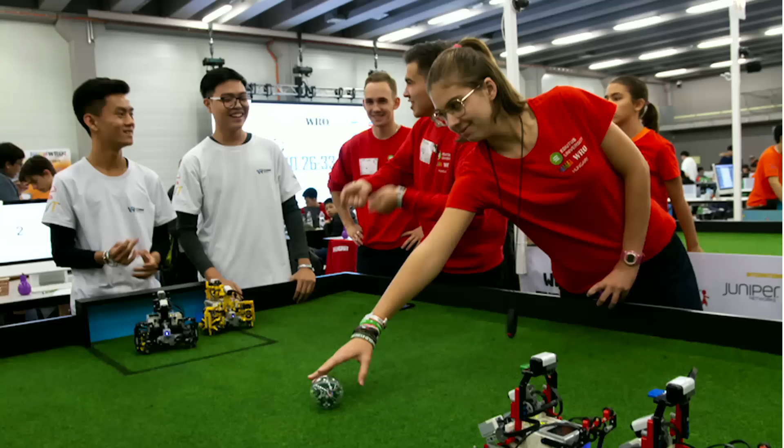We also had kids who had to learn how to program robots for Lego robot football. To realize this, we had to make programming very easy and accessible. Otherwise the kids wouldn't have had the attention to get into programming these robot football players. So we learned something about easy programming from doing that.

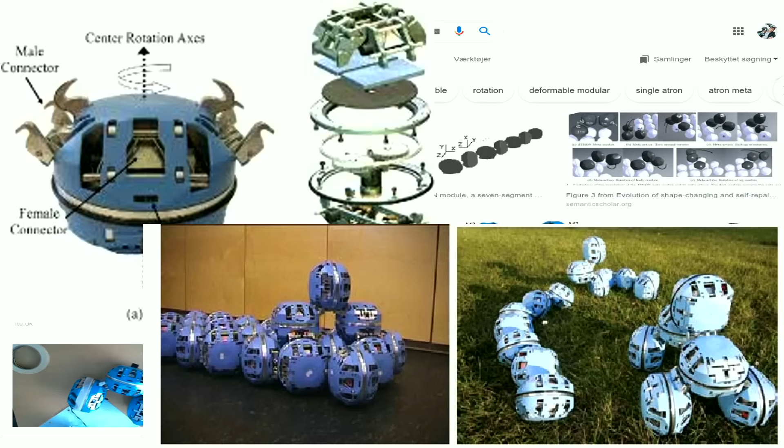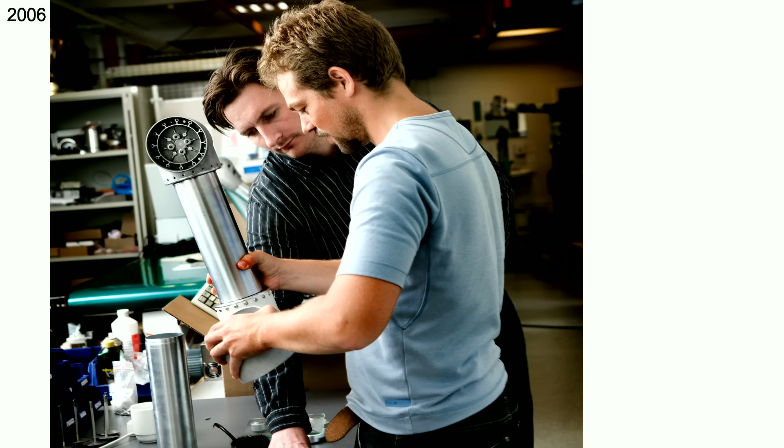That is what made us create Universal Robots, where we started garage style. Here it's Kristian Kassow, the other founder of Universal Robots. We were spending a lot of time coding with oil up to both elbows, trying to build this robot. In the end, we managed to have a robot that actually worked, and in 2007 we had the first working prototype.

I had a meeting with Al Gore and a lot of others. So it became a big thing when we sold the company in 2015, because that year it was one of the largest technology exits in Europe, and it was, of course, a big deal. We sold it to Teradyne for $350 million. I stayed working there for 4 more years, but it was not my company anymore.

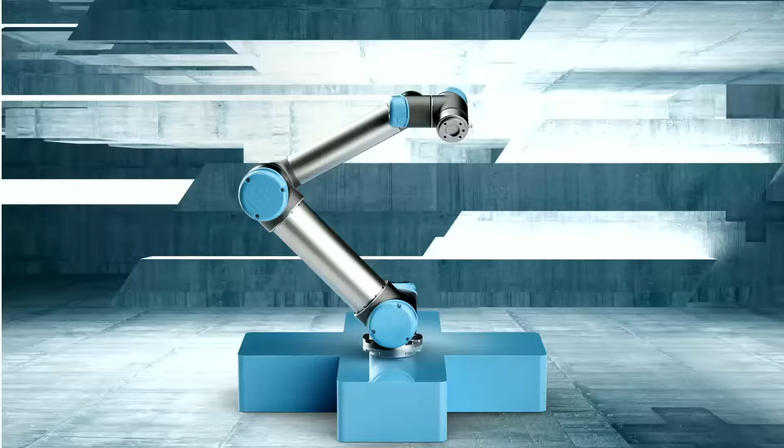So 2 things we did well besides creating the cobot: we also created an academy, which was about lifting people up to understand the technology. The main problem we are addressing is that there are not enough system integrators in the world that can actually do automation. So if we make the robot easy to use, and we train people to become better at programming robots, and we create this ecosystem around the robot that packages technology up into more digestible bundles, we have a winning recipe, I would say.

So we make technology bundled and packaged easier to use for users. We lift the users up to become more tech savvy, and we make a robot that is as easy to use as possible. That's kind of what was the recipe for Universal Robots.

Today there are a lot of different companies doing the same thing. So 194 cobot models, last time I checked. There's a website only tracking how many cobot models are out there. So it has really created a lot of attention, this idea behind the cobot.

And it's also predicted to be a steeply growing market. The estimate was $1 billion market size in 2020. That includes the integrators and the producers of accessories to the robots. And an estimated $8 billion market size in 2026. So it's a steeply growing market.

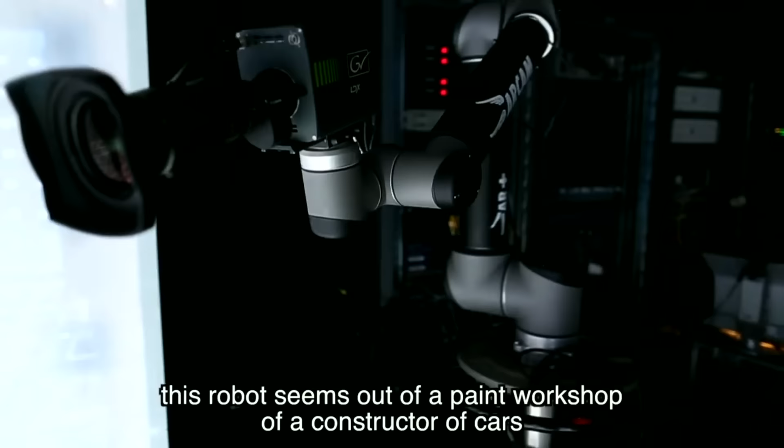And the applications for the robot were also so many new things we had never imagined. The Olympics in Rio had these robots filming both the swimming stadium and the track and field stadium, sitting like this in the ceiling over the commentators. We had this company doing TV studio robots. We have construction sites where these robots are coming in.

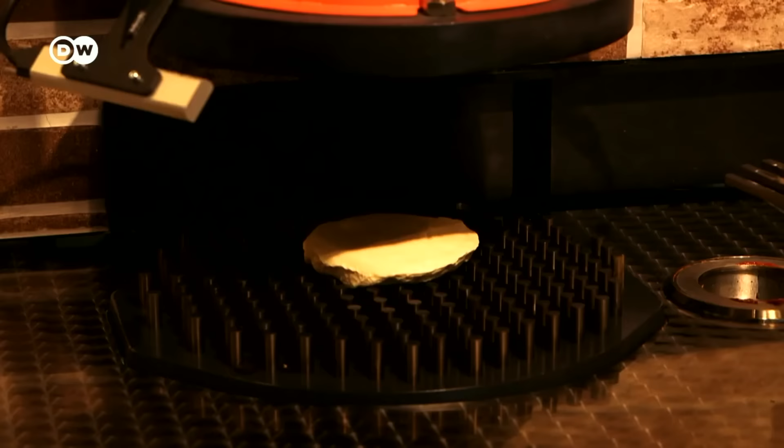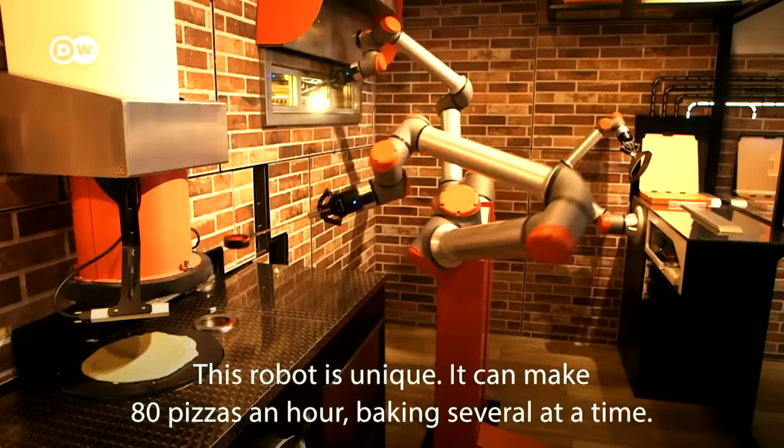And recently we were in Paris, and we saw also our robots producing pizzas near the Centre Pompidou in the center of Paris, where a company has made an application where the robots are serving pizzas. The point is that once you make robots more accessible, there's so many new applications that you open up, and that has been very exciting to see how many new applications the robots have been used for.

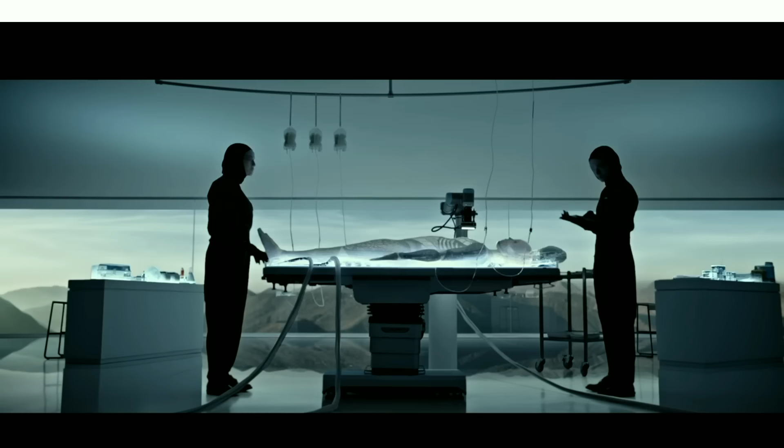I'm very happy when I see our robots used in the movies. It's always a surprise, but fun. I also like that they never redesign the robot - they think it looks futuristic enough to belong in the future. So they don't need to redecorate the robot to make it look like it's from a sci-fi movie. I'm happy about that.

But that was Universal Robots. So where did robotics come from? The idea with Universal Robots is to make this robot into a tool. That's actually a very old history we have - I couldn't find a picture of a Stone Age man, but human evolution has been an evolution with ourselves as a species and the tools we use.

Yes, there are drawbacks of technology, but our lives are also better than ever before. We have higher life expectancy, less infant mortality rates, and in general better lives than ever before in the world. So technology is generally doing good for humankind. That's how we evolve today - it's an evolution through our tools.

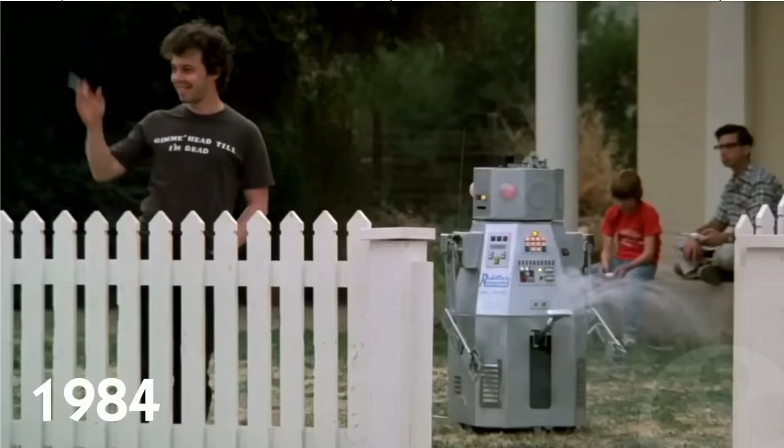At the same time, we have this arts thing going on - we use technology to understand ourselves through technology also. Robotics has some part of that background. If you look back at all the movies and how the idea of a robot has been evolving, they're often very scary robots, but also very interesting. That's why Hollywood and other big movie makers use robots - because of this fear and fascination concept, which I think is also why robots are cool, because they have this duality in them.

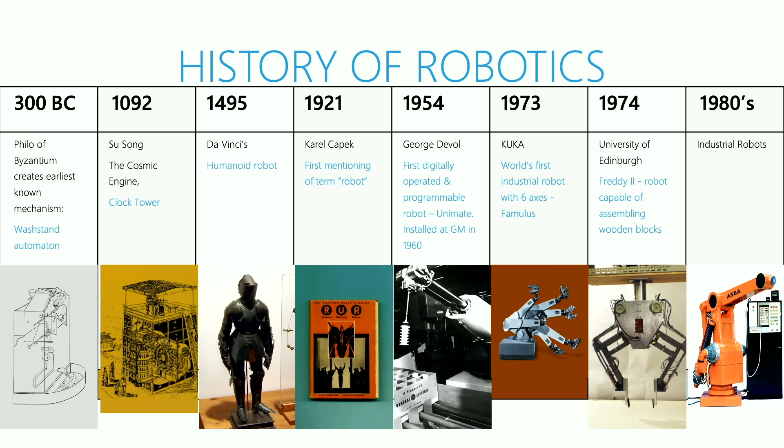Until the 1960s, robotics was in the arts world - it was in fiction, in these movies that I just showed. But in the 1960s, the first industrial robots became useful enough to be used in automotive factories. That's where we had the industrial robot arm revolution starting in the 80s and going on.

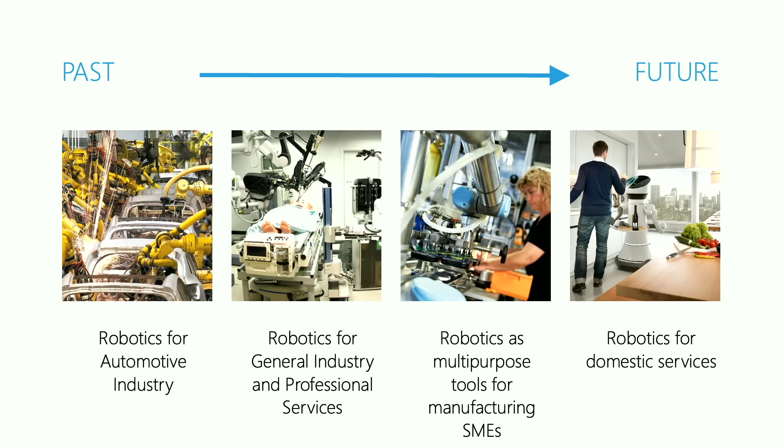The journey robotics is on is from this kind of robot we know from automotive factories, doing the same thing over and over again all the time, toward a future where robots are interacting with people and doing new things every time. That's the journey robotics is on. You can say the cobot is kind of a natural step on that journey, because it's less rigid than the old traditional robots, but not as flexible and safe as the future of robots will be. So we're still on this journey with robotics.

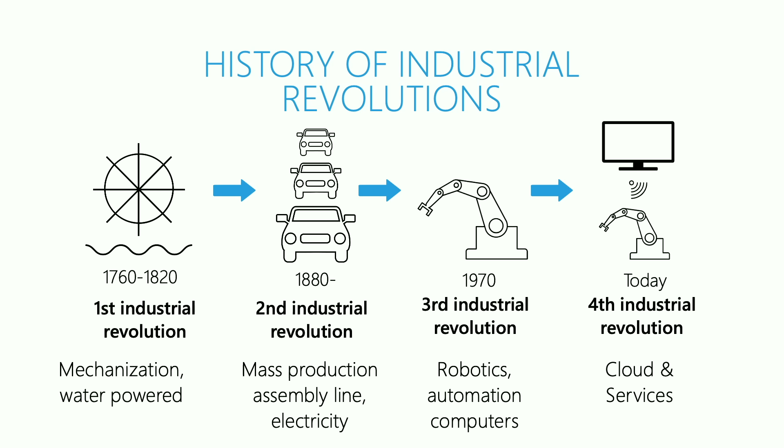Similarly, we have also used technology to create value in different ways, and the dominating technology at each era in our history has defined how we create value with our industry. These are the so-called industrial revolutions - mechanization of agriculture, electrification and steam power in the second industrial revolution, computer-controlled machines in the third, and now Internet of Things, cloud and services as this fourth industrial revolution. Different technologies that have revolutionized how we produce goods.

It turns out that human touch is something very valued by consumers - they actually want unique, well-defined products, and so on. So we're actually wasting something super valuable when we use humans like robots. But that was how it was.

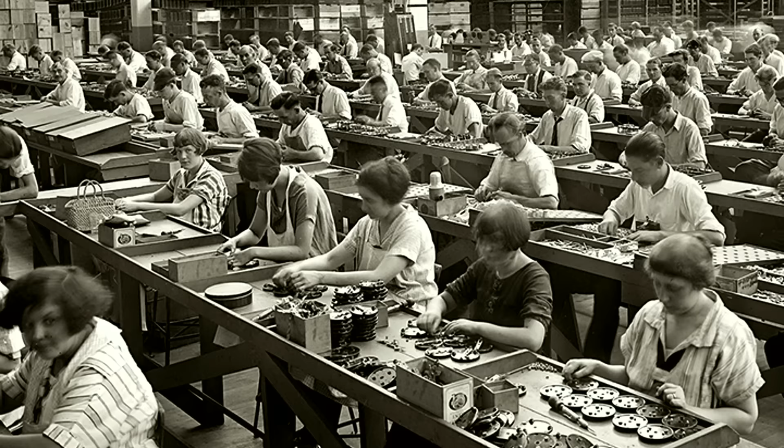So it came from a history of factory work being like this. All these people have work instructions. They are told exactly what to do at every minute, and they have to keep the pace, and they are not allowed to think for themselves. And here's a small kick to the school system - that's actually also how we defined our own school system. We are actually training a lot of students to become factory workers, and that's not what we should be doing. But that's another story.

But you would think that would change office work, that there would be no more office work, but it didn't happen. More people today work in offices than ever before, but they're not just typing the same letter, all of them. They're doing new things all the time. So the disruption the technology brings does not necessarily kill that category of job, it just changes the content of these jobs. And that's the point here.

So if you look across different job categories, you'll see that there's no job that's 100% automatable, and there's no job that's 0% automatable. So all jobs have some level of automation potential, and there are some tasks in each job that can be automated. Nobody's going to go untouched, but everybody is going to benefit from it. There's no single job that's going to be completely replaced by automation, and that's an important point.

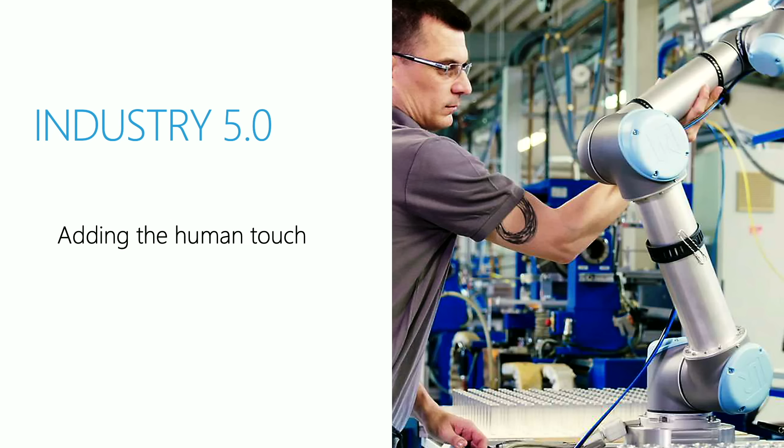And then what is driving all this? What is driving the change? Why are we all not unemployed many, many years ago, since we got the steel mills and the harvesting machines and all that? It's because we are all unique. We want to do something unique with our lives, and we don't want to have the same product, the same doormat, whatever as the neighbors. So there's this concept of Industry 5.0, which is what can we do in factories to produce this human value, this thing that everybody seems to long for.

And that is, I think, also a little bit what cobots did. It made it more easy for factory workers to become experts in their own processes and their own applications. And this mix of man and machine is probably the right way to realize Industry 5.0.

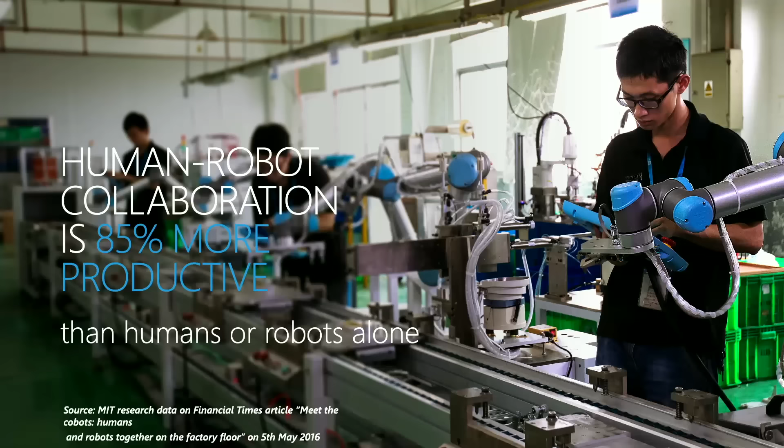And there's been some studies also. I have actually been to this line, I think it was in Taiwan or China, I can't remember exactly where it was. But they could change this laptop line in 30 minutes, and it was the same staff that worked in the factory that changed the whole line to produce a new kind of laptop, and it was very efficient.

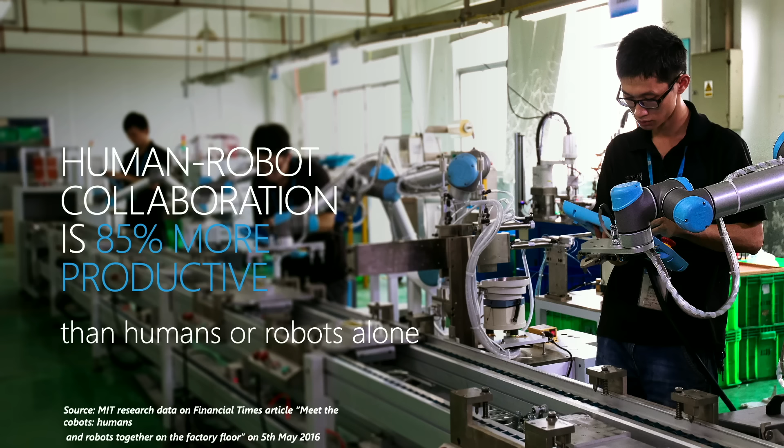So there's a paradigm change here where the Industry 4.0 ideal is a lights-out factory, fixed installation. You press play, the machine produces this good for 7 years at a high volume, low cost. Where the future, I would say, is more about a lights-on factory where we make factories into more friendly workspaces, where man and machine can share the workspace and create this high-margin products that I'm talking about now.

So that was Industry 5.0. So just to quickly go through what's happening in Odense these days. There's quite a vibrant robotics cluster in Odense. It's currently 10,700 employees in the companies, and it's growing very steeply. We expect more than 60% annual growth over the coming years. So that's quite a journey.

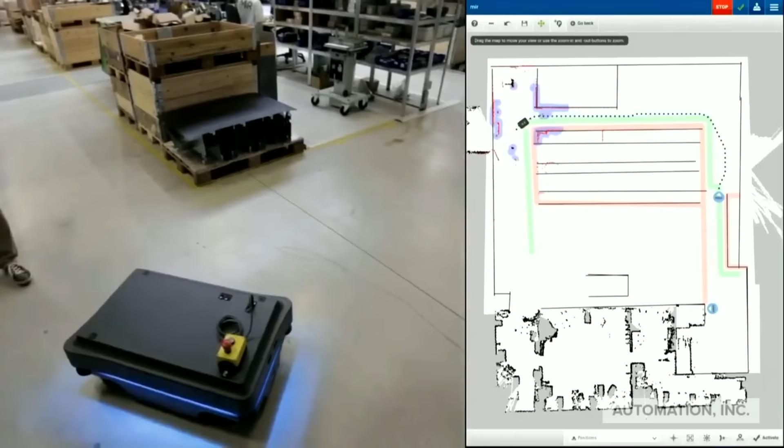And I also just want to mention that after I sold Universal Robots, I invested in mobile industrial robots, which is in many ways the same one. They had a product that, maybe you also know this one, that could drive around, build maps, and it's actually in many ways the same idea - you take technology, you make it accessible to the factory staff, and then you allow them to use it as a tool to create more value and be better at their work.

And sure enough, this company was also sold to the same company, Teradyne, this time for $272 million. As you can see in the analysis, it's actually pretty similar what these two companies have done. They've made the robots intuitive to use, putting advanced sensors into the machines. Safety and flexibility are important. That's the technology side. The market strategy side is local manufacturing and testing, no in-house machines, but selling through distributors and then supporting those distributors. That's the same business model for both companies.

And for myself, I could buy a nice car, and I bought a very fast one, 0 to 100 in 2.3 seconds. Then I had to think about what I wanted to do with my life.

One Christmas evening, 4 or 5 years ago, my wife and I were eating an egg sandwich, and I was in a life crisis because I had sold the companies. I didn't know what to do, and who am I if I am not Universal Robots? So she said, what are you going to do about number one, and what are you going to do about number two? The world really needs to do things, you can't just stop now. That was like, oh, that's a lot of work, how do we do this? We thought about making an education system because education is probably key to a lot of these problems. But since we don't know anything about education, we decided to make robots that solve the world's problems.

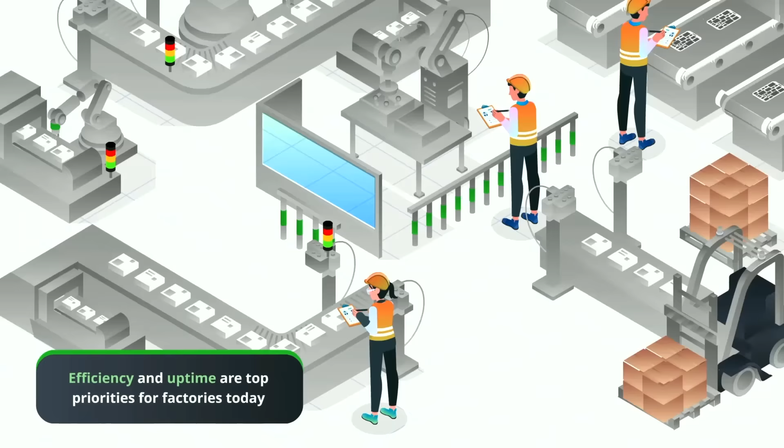Then we are working with a company in Industry 4.0. They have made this box that is an Industry 4.0 in a box, but in my perspective this is Industry 5.0, because they make it easy to use Industry 4.0. That's exactly the point of this company called Trendlog.

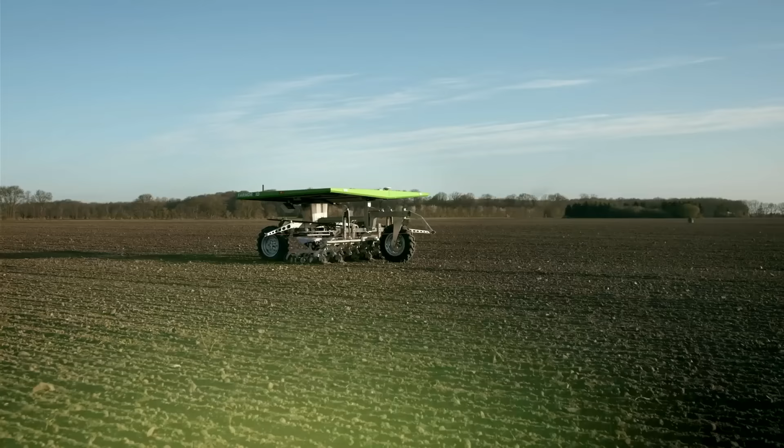We have a company where we make farming robots. This company is called FarmDroid, where they seed by GPS and then weed around it. It's also an interesting company.

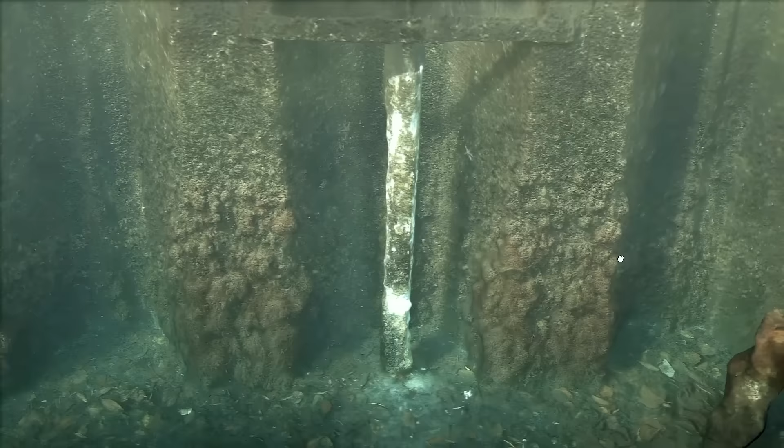We have an underwater robot company where this robot can build 3D maps of underwater structures. I just want to show you one of these maps — this is not a picture, this is actually a 3D map created of an underwater structure. If you see videos of divers doing these things, it's full of bubbles and other disturbances. So it makes a lot of sense to put robots down and build these 3D maps of underwater structures.

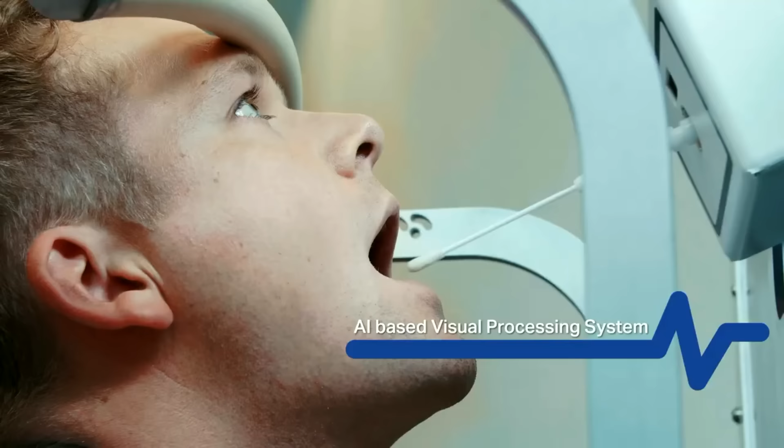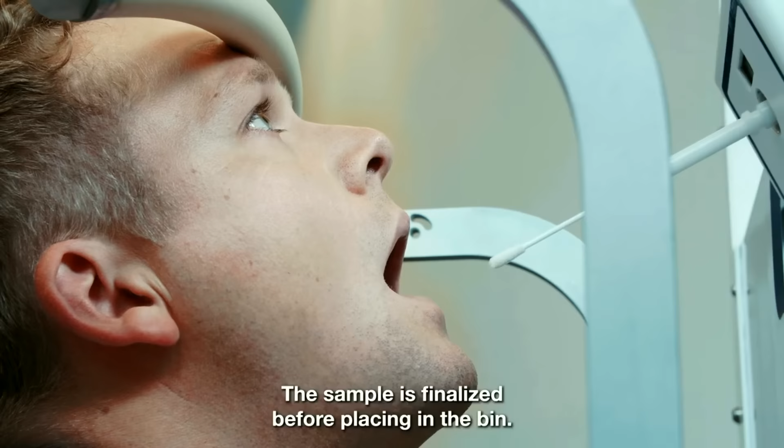Then here's a company that does corona testing, or swabbing of the throat. This is an AI-based approach where it identifies the back of the throat, and then the robot arm drives the swab into the throat and does the actual swab. We made this company when the pandemic started, and then we ran into problems because in Europe it's actually very hard to put products like this on the market due to regulation. It's a little annoying because we very quickly had a product that could solve a need the world had, but in Europe we weren't allowed to use it easily because of European regulations. I'll come back to that later — now I'll come to the blockers of what I think is blocking the adoption of robotics, and why it's not happening faster than it is.

And I think in Europe there's a huge problem with all the regulations we are building up. So we all know GDPR, which is not strictly related to robotics, but all robotics companies need to deal with it anyway. Then in terms of drones, there's a lot of new regulation also, around whether you can fly beyond visual line of sight or not.

And that's limiting a lot of adoption of drone technology. Then we have medtech. Now the medical device directive is changing into the medical device regulation, which has been in effect since last year, but it has created a lot of turbulence in the market about what's legal and what's not.

It's actually blocking a lot of innovation. Then we have the AI Act coming, hopefully not soon, but it might come soon, which is, I think, a mess. And then also the machinery directive is being rewritten right now, and it's bundled together with the AI Act, and it can also create a lot of problems for the European robotics industry, especially related to the machinery regulation.

And I happen to be an expert in that because we made robot arms that were supposed to work outside cages, and that created a lot of discussions with the local safety authorities in various countries. So I know a lot about it, and I can also see how this new regulation that the EU is making is really going to be a big problem.

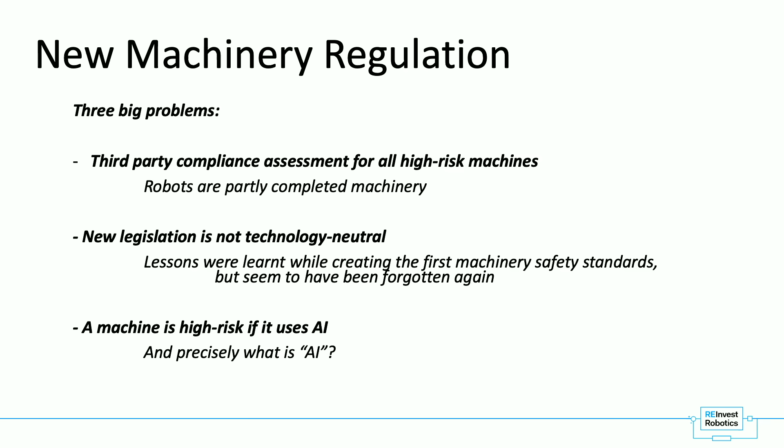So the definition of a robot is that it's always partly a completed machinery. You can't say a robot from the factory is a finished machine. And the problem is that if this robot has software in the safety functions, has AI in the safety function, then by definition it's a dangerous machine, which seems sensible. You don't want AI in your safety functions, but the problem lies in the definition of AI.

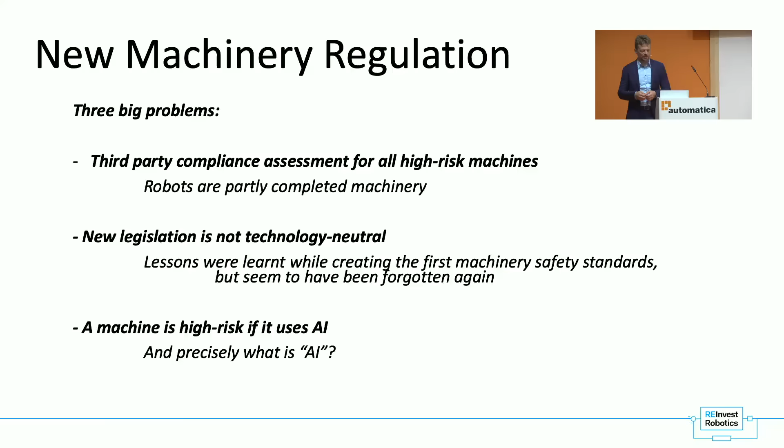That means filters. So if your robot has a filter in it, it's AI, and then by definition it's a dangerous machine. So if this goes through, it's going to be a complete disaster for the robotics industry, and it will mean that all robot installations, not from the factory, but per installation, need to get third-party certified if this goes through. So I hope it doesn't.

And there's a lot of other problems with this new regulation. I just want to hammer in the most obvious ones.

Then you can say the investment environment in Europe is probably not as geared towards robotics as it should be. There's a lot of potential in robotics, but as always, startups are greedy, investors are also greedy, and to find each other is difficult. A lot of investors are used to IT investment, which has like a 6-month time constant. Robotics maybe have a 3-year time constant, but we know it's possible to invest with these time constants because medtech, medical devices, medicine and stuff, it's more than 6 years normally to get a product on the market there. So it should be possible to realize this investment environment, but I don't think it's there yet.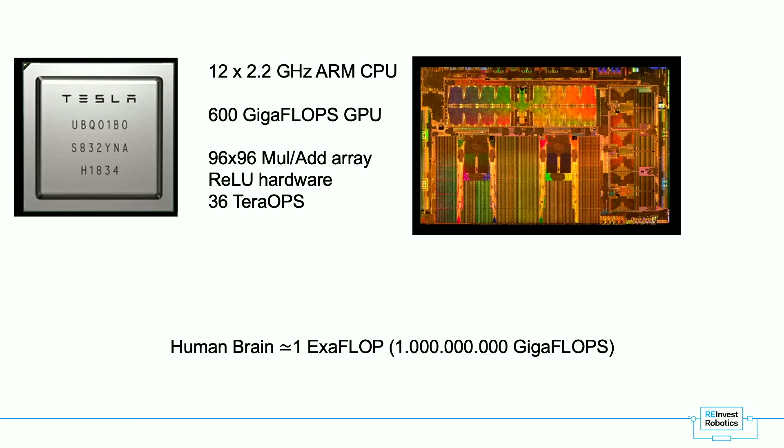So now we have first the transition to GPUs and now dedicated AI chips, which will have a huge impact on what we can do with AI. And you can see here from this self-driving car video that the industry around self-driving cars is really pushing progress for using AI and advanced sensor technology, you would say.

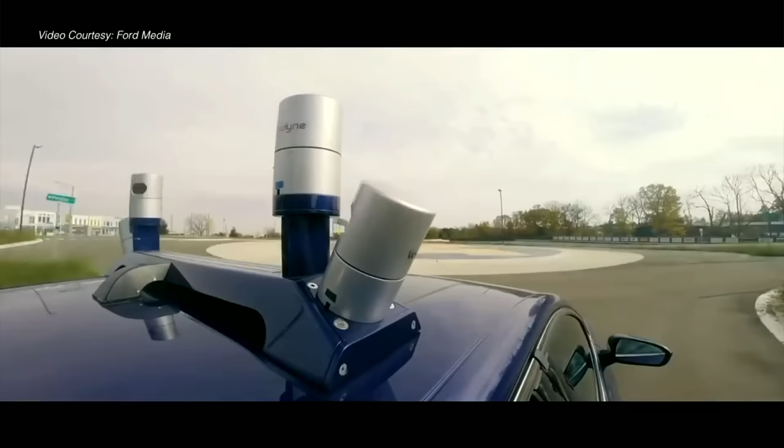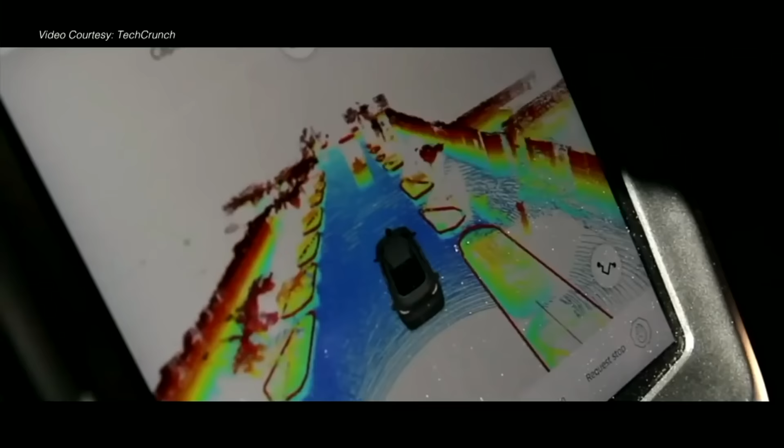Personally, I'm a little bit more of a fan of LiDAR, which gives, I think, better results, but it's in a way similar to vision-based AI approaches, where it can also do tracking of objects around the cars. And all the research money that goes into this, both in the technology and in its application, will of course also impact robotics. A self-driving car is in many ways simply a robot.

On the actuation side, actually not a lot has happened. We know the servo motor hasn't changed a lot in the last many years, but I think there's beginning to be some change here, driven also by the automotive industry, where we have reluctance motors and other new, a bit more exotic takes on the electric motor.

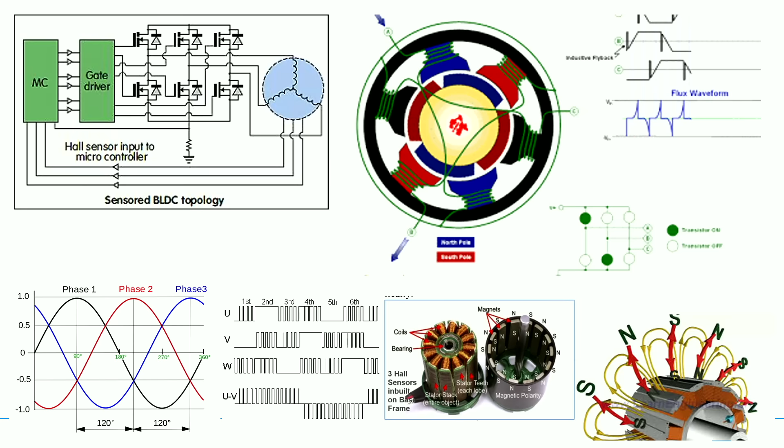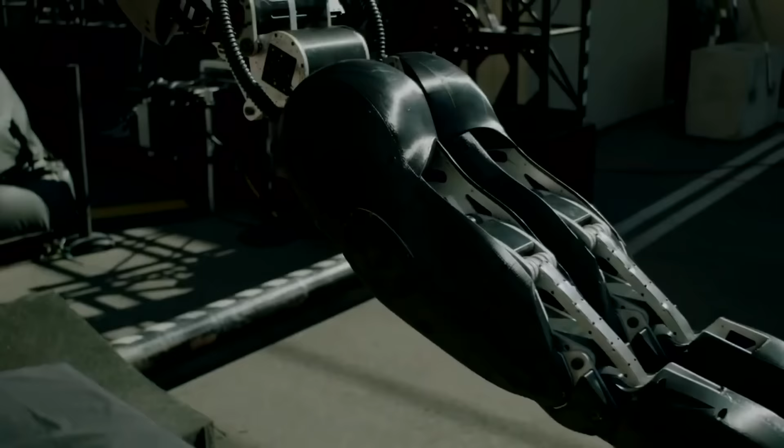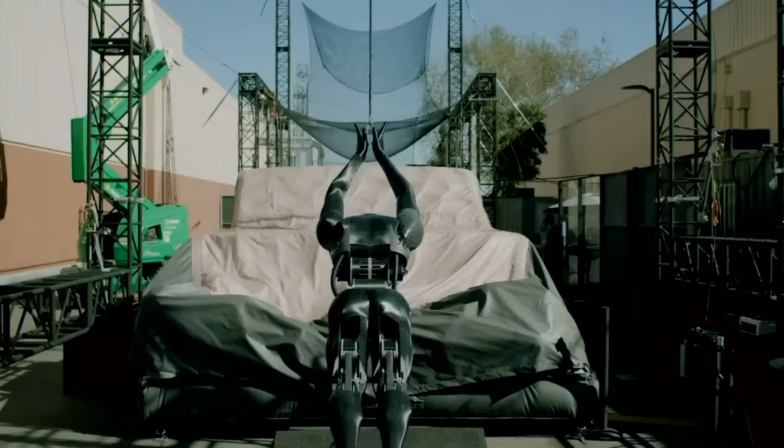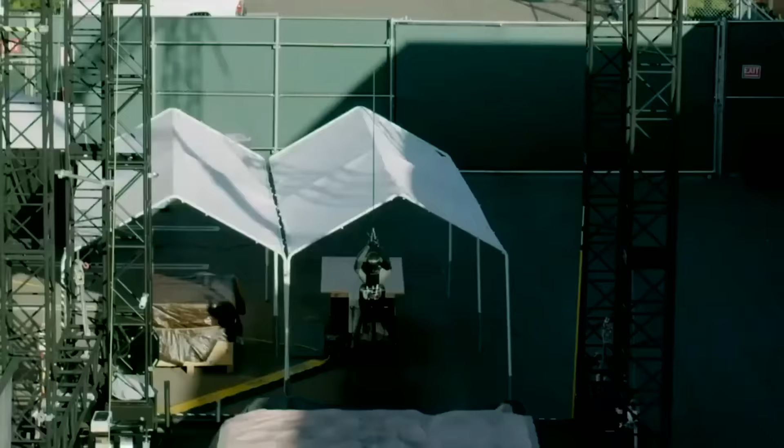This is not computer graphics, but it's used to make computer graphics for the Spider-Man movies. This robot is launched into the air, and then it uses pneumatic actuators to actually make quite realistic human-like movements. I think the air capacity for this robot is only for a few minutes, maybe only a few seconds, so it can probably only do this, but it's still a pretty impressive actuation technology they have to realize this. And of course, it also has to be super robust to survive the impact when it lands. I think it's pretty cool.

Other drivers of robotics are actually the pandemic, which has driven a lot of robotics adoption. It's easier to have robots coming to work than staff that might get sick. Supply chain disruption is of course also reshoring a lot of work.

Out of time, 3 minutes, okay.

Supply chain disruption is reshoring a lot of work. You can't have these super long supply chains anymore. Aging workforce means you need robots when people are too old to work. And of course, unfortunately, the war is also creating new interest in robotics and producing closer to home. The EU is doing some things to try to incentivize this.

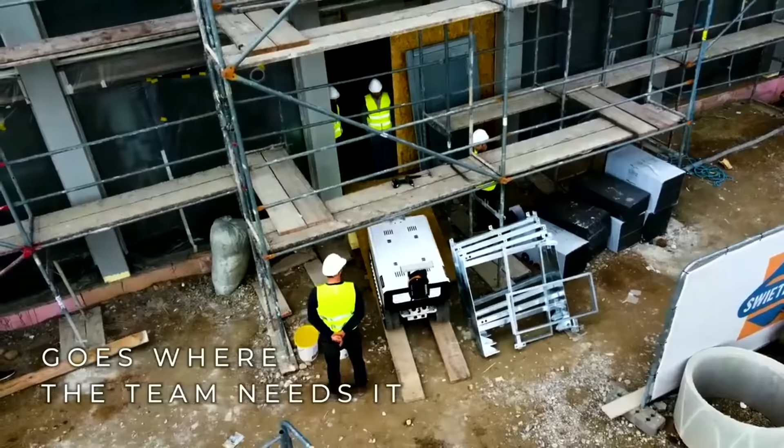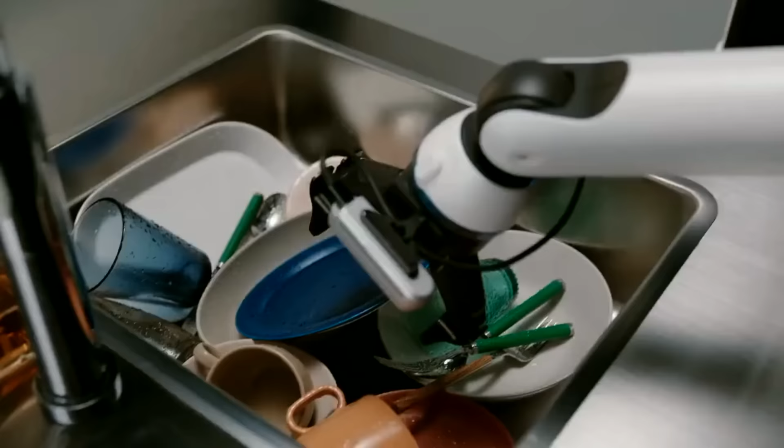My last statement is simply that I think there's going to be a huge explosion in robotics. We're going to see robotics coming out of the factories, as I showed earlier, and into a lot of new application areas, and probably into the home sometime. This is a very serious attempt by Samsung to make a home robot, and it's probably going to go this way. Over time, the technology will be ready for these kinds of applications. So I think robotics is on a super exciting journey.

My bet is that the next take on robotics will be going out of the factories into logistics, as we've seen in recent years. Then after that, construction, maritime, offshore, food, agriculture, and the health sector, and sometime after that, more into people's homes and our everyday lives. So I think it's a very exciting field to be in. Congratulations to everybody for being in robotics, and thank you so much.